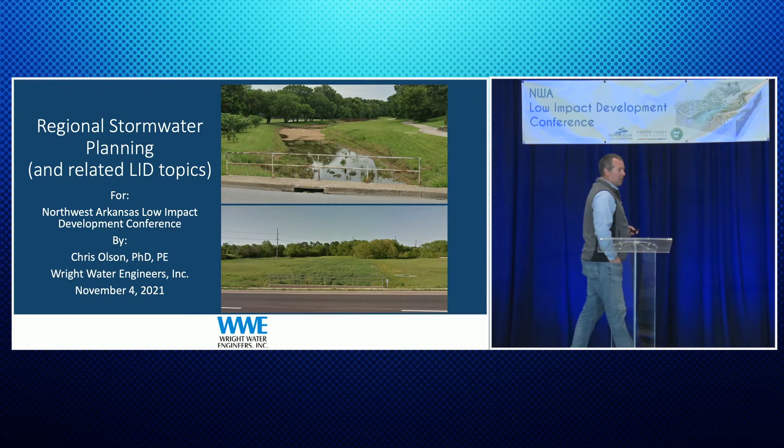I just have a few things I'd like to share with you today about, mostly regional stormwater planning and a few other low-impact development topics. The other topics I'm going to talk about, and these are kind of in the order of length and level of detail: full spectrum detention, which I'll get into, but it's basically a detention basin design technique that we have found is very effective at reducing some of the erosion problems that we've learned about earlier this

week. And then, of course, the more traditional definition of low-impact development, a lot of us start to think about just green infrastructure. We've seen plenty of presentations on these. We do have a lot of experience working with that, so I'll finish up with a few lessons learned that myself personally and Wright Water Engineers have found over the years working with green infrastructure. And then we'll see if we have some time for Q&A.

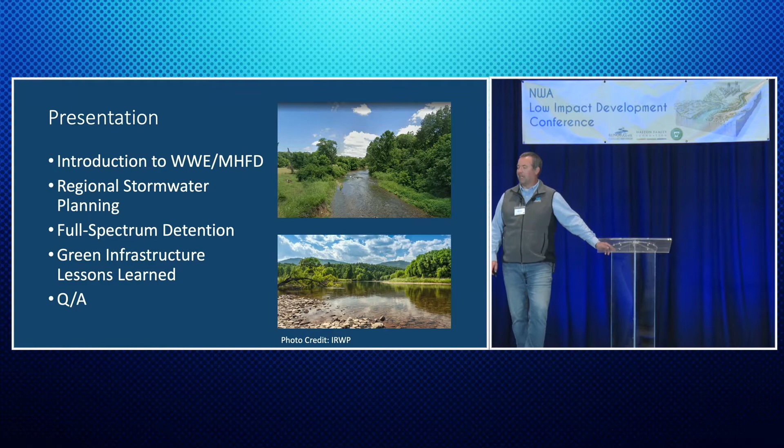So I do work for Wright Water Engineers. The reason I am here is because I'm really standing on the shoulders of giants that have been working in Northwest Arkansas for a number of years. We're approximately 50 employees in 3 different offices, Denver being our main one. We're also in Glenwood Springs and Durango, for any of you that are interested in working for us and moving out to a mountain town.

Those options are available. And like I said, we've been involved over the last 30 years or so, not myself, obviously, but some others, working on a variety of projects from criteria manuals. We saw a little bit about the Cave Springs Recharge Project. We were involved with that. Master plans, permitting, wastewater, stormwater, phosphorus analysis, et cetera.

And Wright Water was founded as an urban drainage and, to a certain extent, water rights firm back in the 60s. And that has really led over the years to a lot of our folks being national leaders in stormwater practice, developing manuals of practice and modeling and things like that. So this is definitely our forte, these types of conferences.

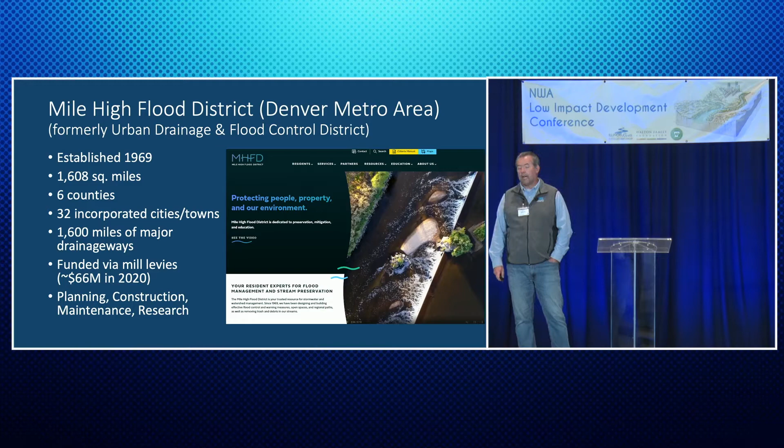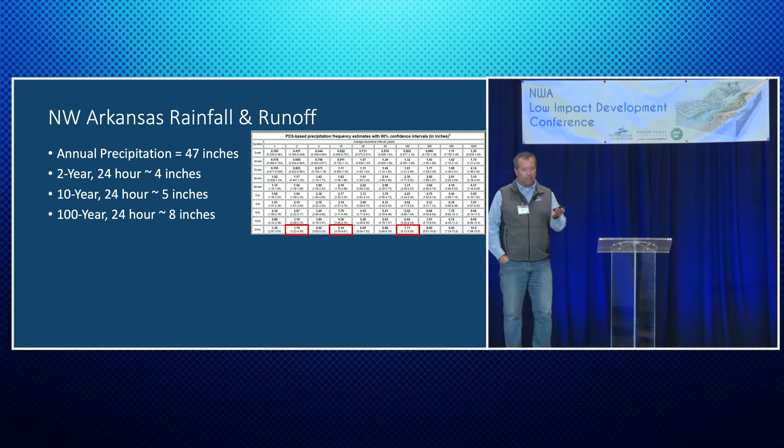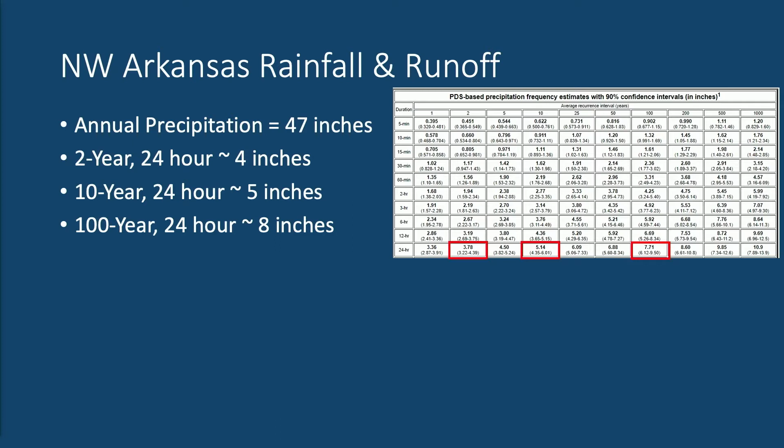So, again, just to start off and put things in perspective. I always like to do this whenever I'm traveling somewhere because rainfall is different and runoff is different. These are just some quick, rough numbers. This is annual precipitation around here. For the different storm events, I'm going to be talking about the 2-year, the 10-year, the 100-year storm event. So you're looking at roughly 4 inches, 5 inches or 8 inches of rainfall. And what does that mean in terms of runoff? Again, these are rough, back of the envelope numbers.

But for converting 1 acre of undeveloped land in northwest Arkansas, we did a low density, like a typical large estate, 1 acre single family home type of development, to high density, maybe 95% impervious. You can see what that results in terms of additional water in the streams.

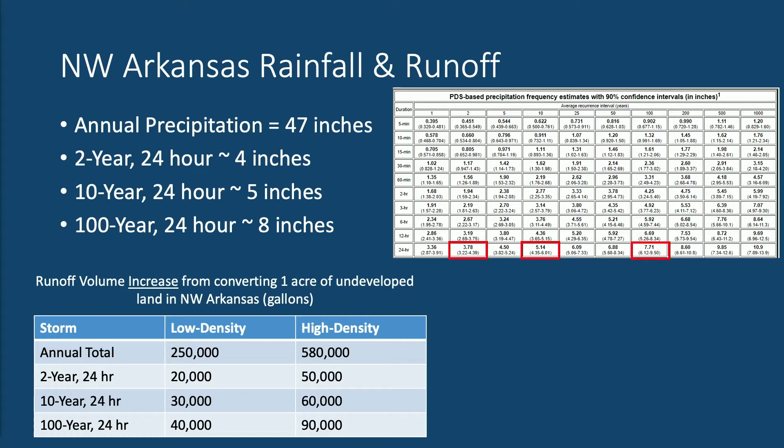Annually, you're looking at about 250,000 gallons of additional water in the stream, up to 600,000 gallons for high density. And that's 1 acre. What's the inside of this hangar? Maybe a half acre, something like that, maybe a third.

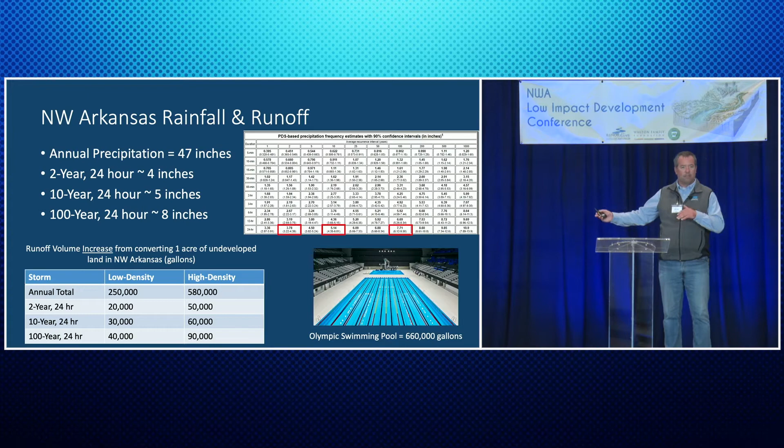So to kind of put that into perspective, an Olympic swimming pool is a little over 600,000 gallons. So if you take 1 acre of farmland and you put an apartment lot to lot on it, you're going to result in an Olympic swimming pool worth of additional water going down the stream each year.

That's not surprising. There's always somebody downstream. It's no different from what is happening around here. So we know this. Stormwater impacts don't follow governmental boundaries. The downstream communities suffer for the decisions and the development that occurs upstream if it's not done well and carefully. And so it just makes sense that everyone recognize they all suffer the consequences from somebody else upstream, and they also cause impacts downstream. So let's come together, work together, let's acknowledge that,

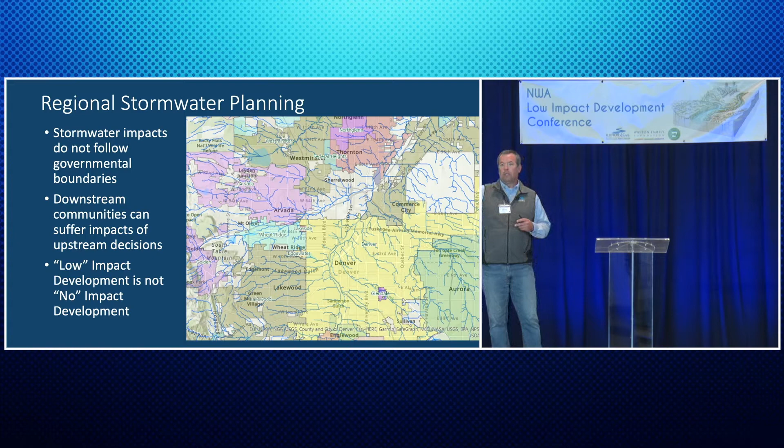and start to figure out solutions. And I have this last bullet point here: low impact development is not no impact development. And I do think that's important to remember, because we can't just be thinking about solving the problems that exist right now. Development is going to continue to occur. And even if we can do low impact development, it's still going to have an impact, and there are still going to be things that we need to think about and mitigate into the future. So we're not just solving today's problems, we also have to predict and think ahead to solving our future problems.

I think the goals of stormwater planning, whether it's local or regionalized, are for the most part simply a difference in scale. We want to protect people and property against flooding and erosion and stormwater quality problems. Obviously, the regional part is that you're working with other organizations, other municipalities, and doing it in a cooperative manner.

You'll see as I go through this, the outcomes of stormwater planning are really capital improvement projects, plans to set aside and preserve space for stream corridors, regional detention, for example. It helps developers understand what they need to adhere to in their development. I'll talk about an example there.

Before a developer goes and decides to purchase 160 acres, for example, they're going to go to the master plan, and they're going to look, and they're going to say, this is what's in the master plan. They've already put in a stream. They're calling for a stream corridor that needs to be preserved. Or they're calling for a regional detention facility in this location. Developers are going to want to know that. And it's important. So we're aiming to set that out and be transparent for the developers that are coming in the future.

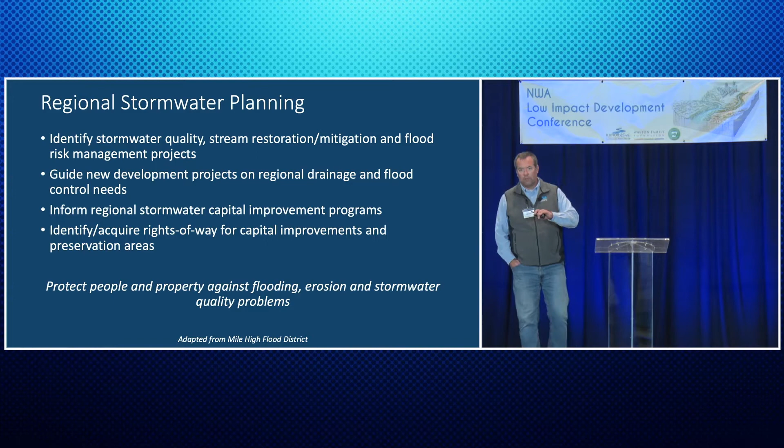Again, I'm presenting our Mile High Flood District, Denver metro area process. It's not the same everywhere, but it's been successful. The first regional master plan in the Denver area was done in the early 1970s. So they and we have been doing it for a while. Again, I'm fortunate enough to learn from the people that had to rack their brains to figure out how to get this to work 40, 50 years ago, I guess.

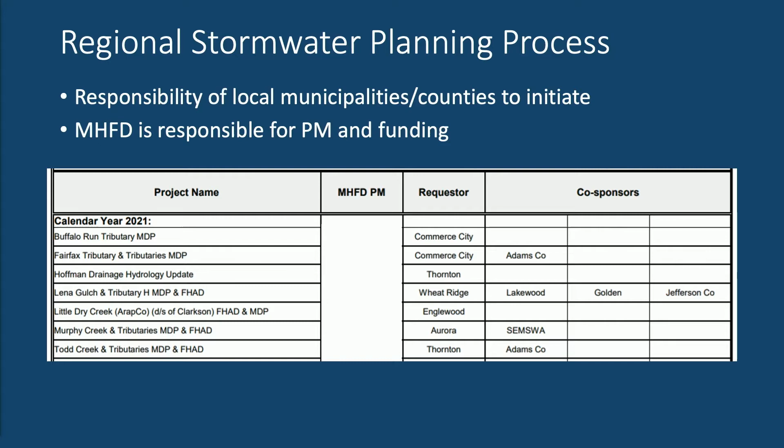The way it works is you saw all those different municipalities, counties, towns, cities on the map, and any one of them can request a master plan, either an original master plan or an updated master plan, at any time. The Mile High Flood District is funded by a mill levy from all those cities and counties. So they go to the district and say, I'd like to do a master plan on Buffalo Run tributary. I'm Commerce City.

Okay, well, there are a lot of those requests that come in every year. There's only so much money, so it gets put on a list. It gets prioritized according to funding and some other factors. And then there are obviously the co-sponsors that are involved. So here's one example, Lena Gulch, that has Wheat Ridge as a requester and then 3 other co-sponsors, because that tributary runs through all 4 municipalities. That means all 4 of these organizations need to come together and work on this master plan. And so then it really becomes the district's responsibility for managing that project and for funding it.

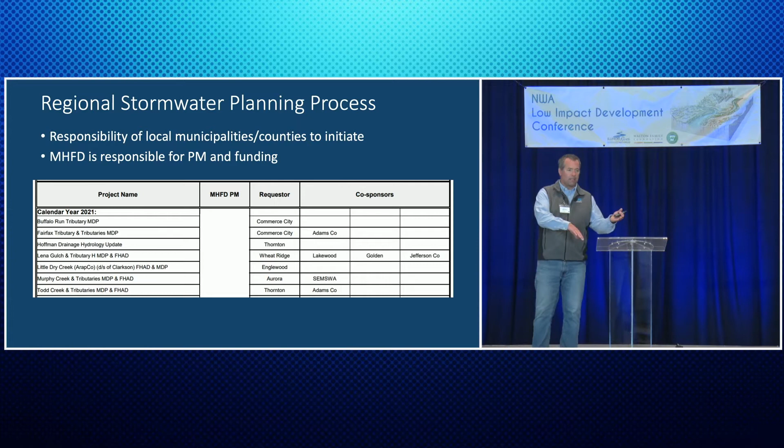I've taken specific names out of this, I know it's probably going to go up on the website and stuff, but the one thing that the district started doing a couple years ago, which I think everyone that's working there thinks is a great idea, is they've assigned specific project managers to each major watershed. It used to be that it was kind of ad hoc. You got a list of project managers, you got a list of projects. Bob is going to be finishing up his project, so he's going to take this project and run with it for the next 6 months or 9 months or whatever it is.

And as you'll see, the results of these master plans are projects, capital improvement projects, and other things. And so it made sense that the person that was involved in managing the master plan also then manages the implementation of those projects down the road. And it's been a great modification by the district to do that because now Joe or Elizabeth or whoever who's managing knows all the projects that are going on.

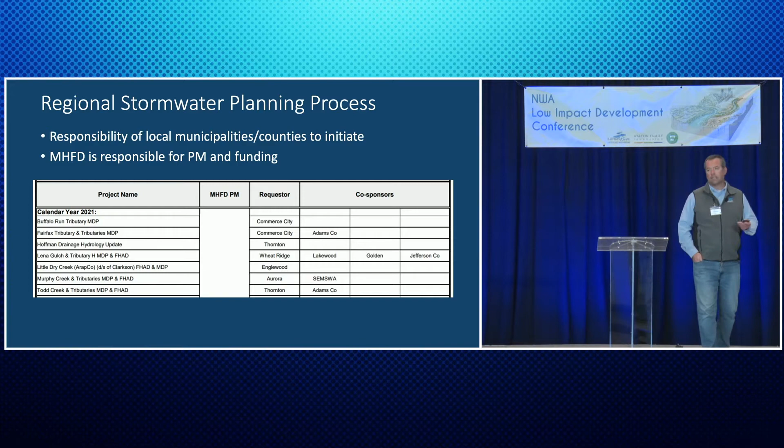So if all of a sudden I get called in as a consultant to work on this regional detention basin and I have to run my models to do my design and whatnot, I go to the project manager and say, hey, did this detention basin up here ever get built? If not, when's it going to get built? Oh yeah, it's in design right now. Here's the specs on it. Put that into your model for your design. They know everything that's going on. So it's been a really good change, something to consider if you guys are doing similar wherever you work.

So really the process is a very engineering process, as you might imagine. We start out with models, hydrology and hydraulics models, and it's not easy to put those together by any means, but that's the basis for everything. That's the foundation. So we generate these models for existing conditions and future conditions, and from those models we identify the potential problems. Where does flooding exist? Yada yada, and I'll kind of go through what those are that we look for.

And then once you identify problems, then you start looking at solutions. And you do an alternatives analysis where you start comparing the costs and the benefits of using this solution versus that solution. And the list here, again, a generally pretty engineered process depending on where you are and depending on the level of development that has occurred. So sometimes it's as simple as upsizing a pipe or upsizing a culvert. Put regional detention here, preserve this stream corridor there, and we'll kind of talk about why we might select one over the other.

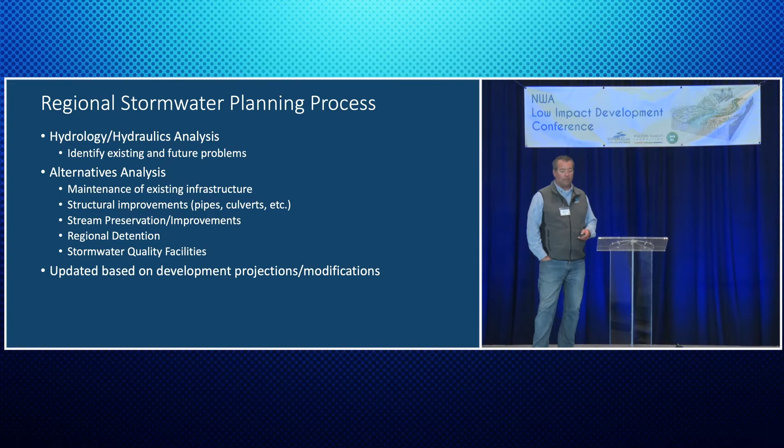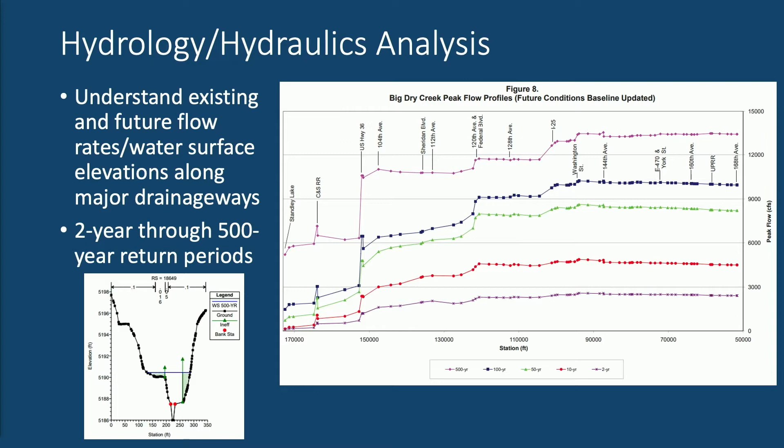It is important, I think it goes without saying, but it's important to understand what your planned future development is. Otherwise, we're just fixing the problems for now. So most cities and counties have some sort of a growth strategy or a growth plan, whether it's zoning or land use data. By 2050, we expect this all to be commercial. By 2040, we expect this to be all low-density residential. The results of your master plan are only as good as your plans for future development, and that's part of the reason why they do have to be updated, as I kind of mentioned.

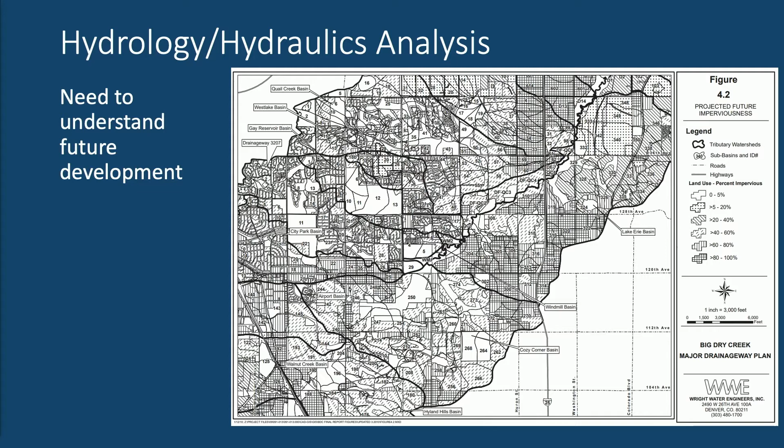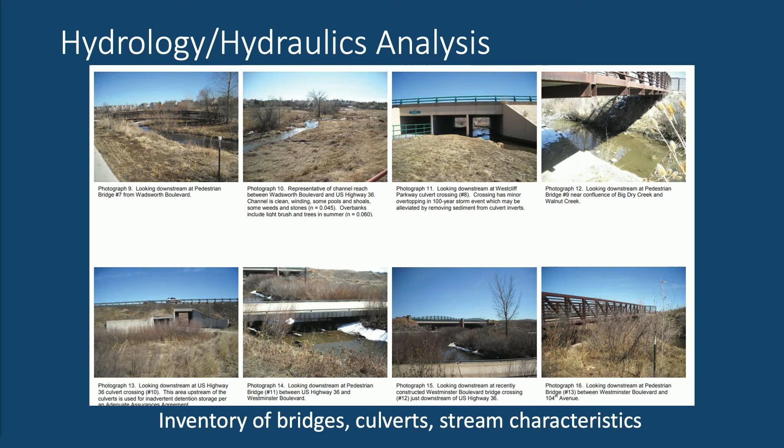Another very extensive part, and I am focusing quite a bit on the H&H here, because it really is the foundation. You need to get it right. You go and you inventory all your bridges, all your culverts, all your stream sections, especially in an area that's already urbanized. And this is quite a bit of work. It's fun work. I like to go out and do it. But a certain master plan can have 100 different bridges and culverts, or 200 bridges and culverts, depending on how big your area is. That's also obviously a very important part of the process.

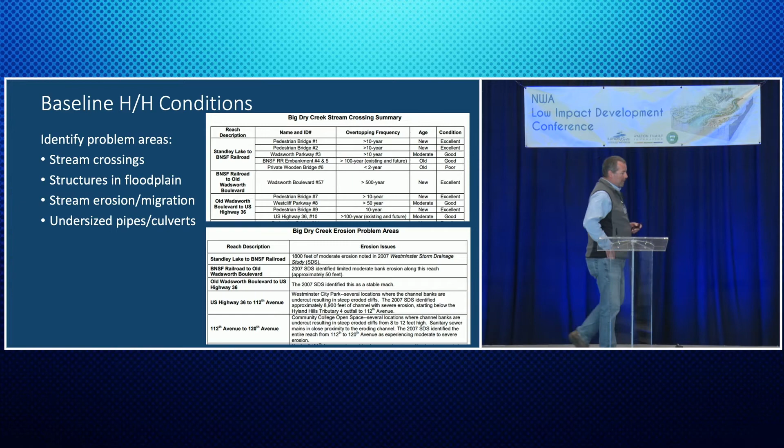And so we do all this, and we start running our models, and that gives us our ability to identify problem areas. A couple of examples are shown here. So we look at our stream crossings, and we see that a particular pedestrian bridge somewhere is going to overtop in the 10-year event and greater. Maybe that's fine. It's a pedestrian bridge, right? But what if that was a county road or some other facility that really shouldn't be overtopping? That's what the results of our analysis will provide us.

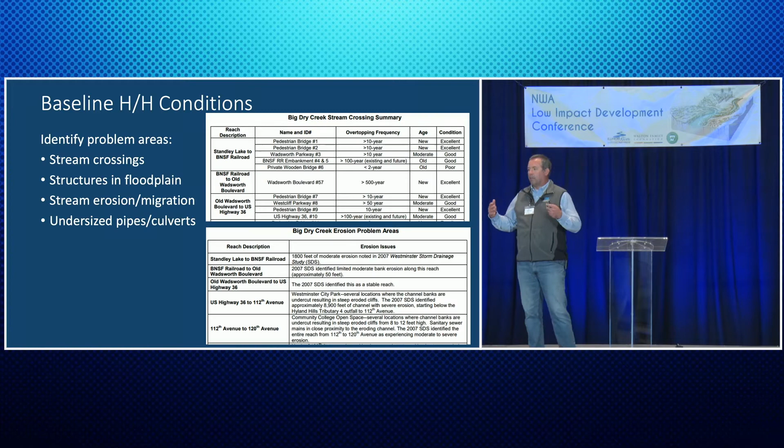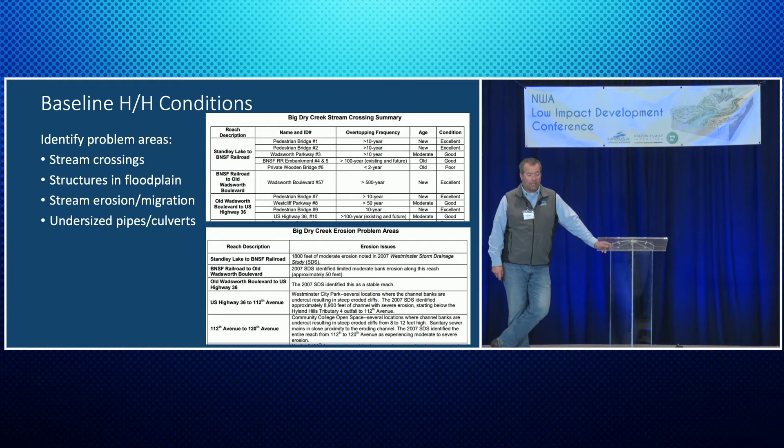The number of structures in the floodplain, that's huge, right? That's one of the basic objectives of doing this, is to remove structures from the floodplain. Identify major stream erosion and/or potential erosion and migration areas, and then obviously different undersized infrastructure. So this is, I think, the fun part for some of us, which is now we need to start figuring out the best way to solve these problems.

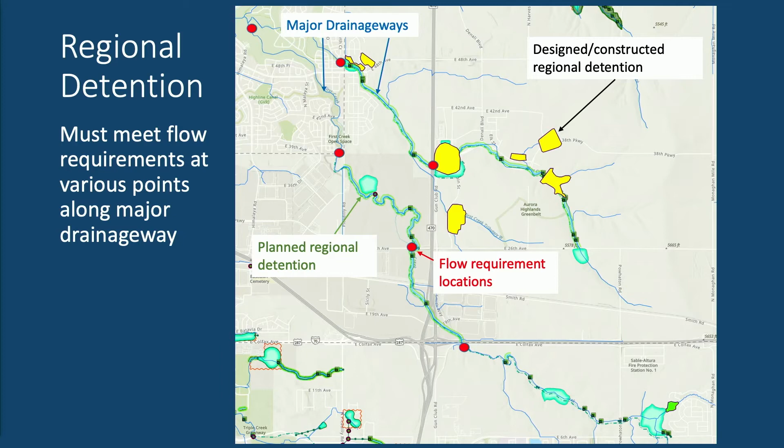So this planned regional detention that I have shown here, kind of highlighted in the middle, this is a project that we worked on, and we were working with the developer on that site, and I knew what the peak flow was going to be upstream. Not right now, but I knew it was going to be in the future, and I had to design for the future. I also knew the peak flow rate that I had to meet immediately downstream of the site. So I had those two constraints to guide the design of that detention basin, according to the master plan.

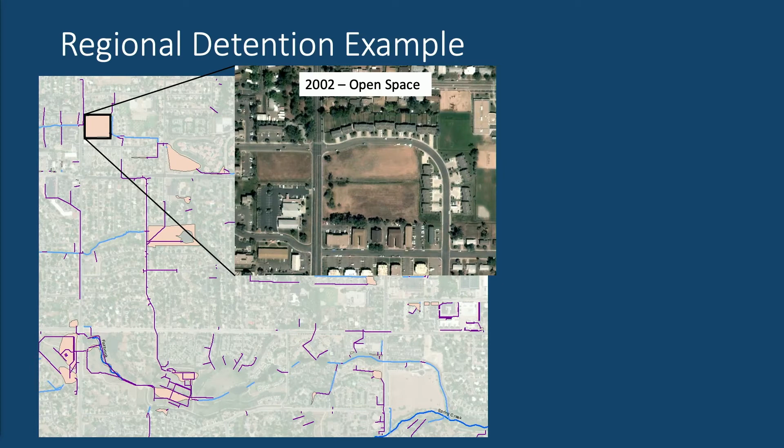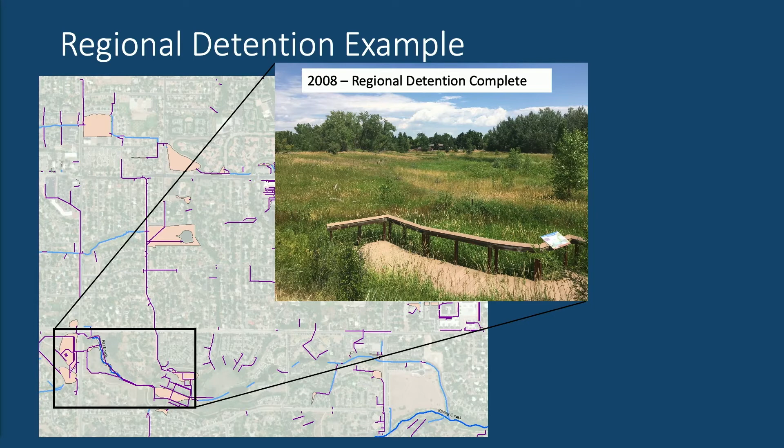Real quick, so these are just some examples. A master plan that was done in the early 2000s, developed watershed, recognized that they needed to keep this area of open space available. It was 10 years later, but they went and finally completed it as a regional facility. And then same thing here, a regional plan that was done in the late 90s. Took a while, but ultimately, a real nice regional detention basin was built.

I like this. It's doing double duty. It really is driven by stormwater control, but you can see here it's a really nice open space. It attracts wildlife. There's trails running through it, so it's a multi-purpose facility.

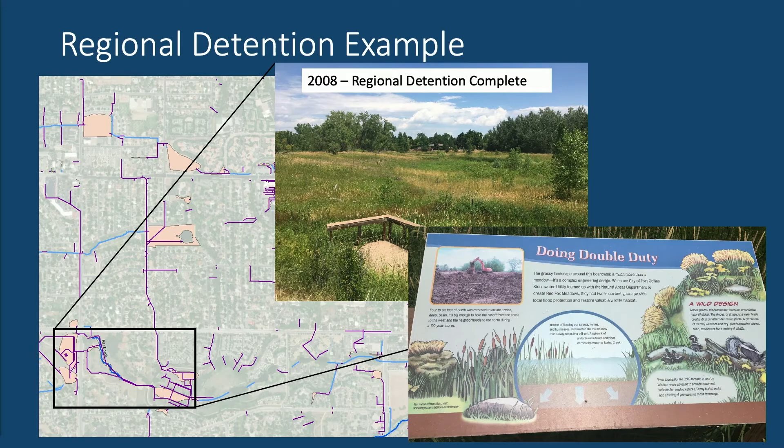Okay, I want to get to the other main topic, so I'm switching gears here. We'll have some time for questions. Full spectrum detention. We've talked a little bit about detention in this conference, and I guess I'll start with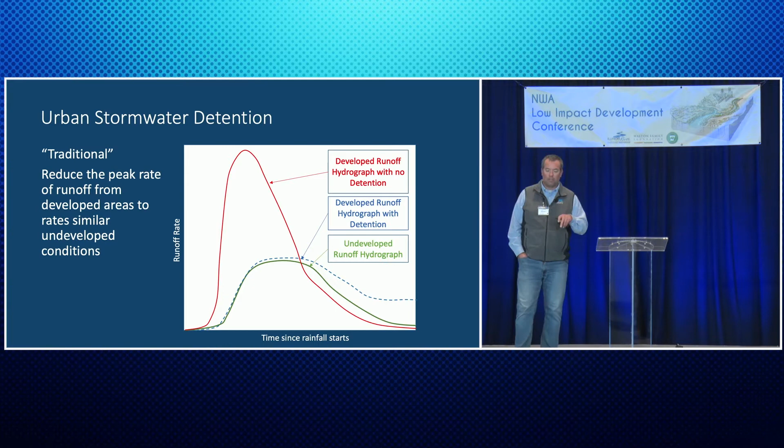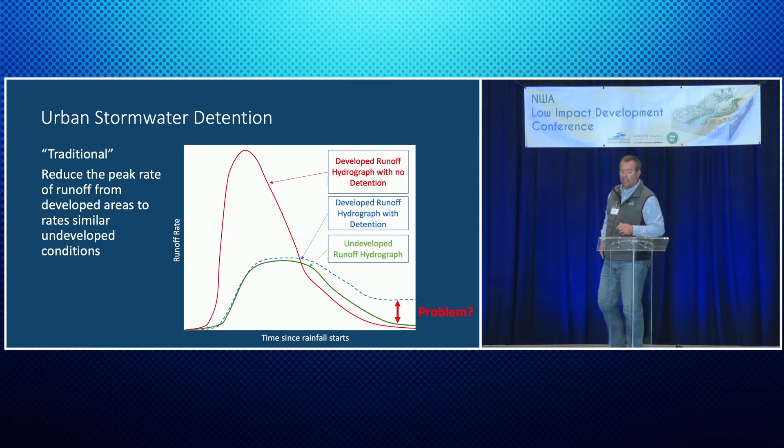But I want you to look at these hydrographs and notice the peaks match pretty close. But once the water starts to drop off below the peak, you'll see that the runoff rate out of the detention basin remains higher than what it was in the undeveloped conditions. And so is that a problem?

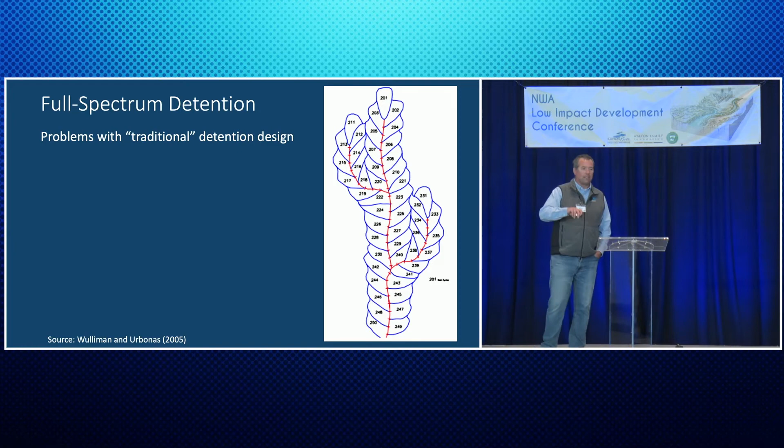Here, let's consider this to be a large regional watershed of 50 subbasins, each of the exact same size. All right, so 50 100-acre basins, they're all the same size. And what I'm going to do is assume that I put the same detention basin at the outlet of each of those watersheds and simulate what that looks like. And these particular detention basins are all sized with the criteria of meeting the pre-development 10-year and 100-year peak.

So if I look at the discharge from one of those detention basins, that's what's shown here in this graph. And if I look at the 100-year, you can see that the red line, which is developed condition with the detention basin, matches the pre-development peak flow rate, the green line, at the 100-year level. Great, we're good. Same with the 10-year. The red line basically falls on top of the green line. We're good.

Now we'll look at the 2-year. Now all of a sudden the red line's quite a bit higher than the green line. It's not quite to the developed without detention blue line, but it's higher. So right away, this might be a concern, and that's because the 1 to 2 year storm event is generally, rule of thumb, what controls the size and the formation of our channels.

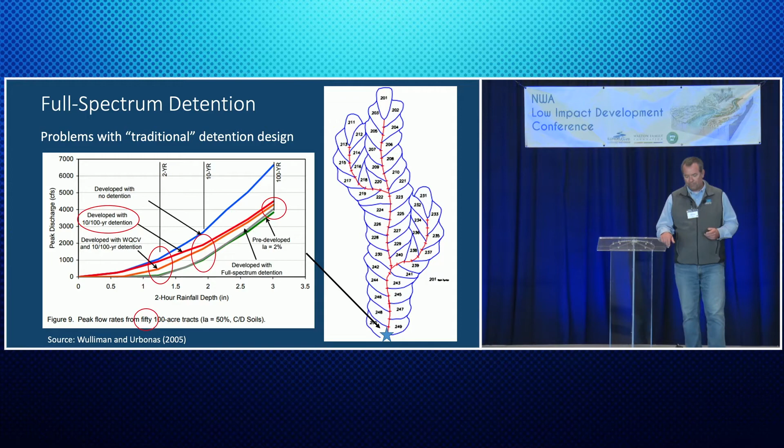So, Ben and Jim, who are obviously much smarter than me, came up with this. They started thinking about this. And the first thing they figured out, they did some modeling, and they realized that the increase in runoff volume between pre-development conditions and post-development conditions is pretty much the same regardless of the size of the event, whether it's a 2-year event or 10-year event or 100-year event. The difference is the same for the same imperviousness of a watershed.

So, for example, what I've circled here is a site with 25% imperviousness. Developing that site with 25% imperviousness results in about 0.3 inches, watershed inches, of additional runoff from that site. That 0.3 is the same whether it's a 2-year event with 1.5 inches or whether it's a 100-year event with 3.5 inches. And the same can be said for other events. In this case, for 100% impervious, if I go from undeveloped to 100% impervious, I have about 1.3 inches of additional runoff.

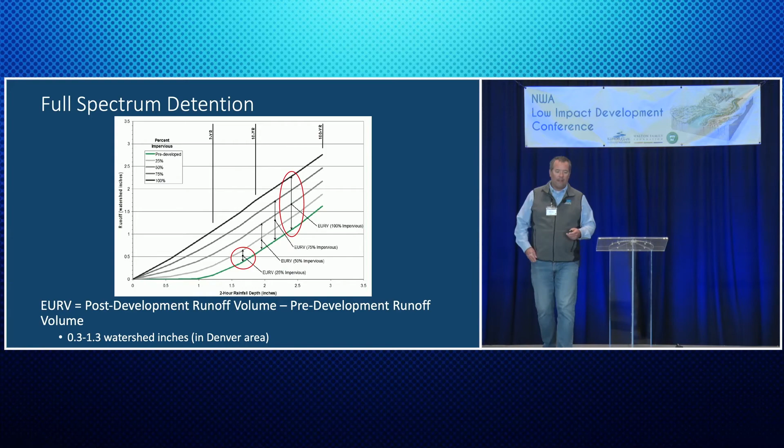So they took that concept and they started playing with it and doing some modeling. And ultimately what they got to was that if we take what they call the EURV, the excess urban runoff volume, the difference between pre and post-development runoff, let's capture that, and then let's slowly release it over the course of a couple days. I'm jumping to the conclusion, but right now the criteria say, at least in Colorado, 50 to 72 hours. Capture that 0.3 to 1.3 inches and hold it for 50 to 72 hours.

And there's not a real physical or scientific reason other than you're trying to release that as slowly as possible to reduce the stream power being delivered to the stream. The 72 hours, this is a Colorado constraint. We can't capture and hold water for longer than 72 hours because of water rights. It's a very Colorado-specific requirement, but it's just something that we have to live with in Colorado because somebody else owns the water.

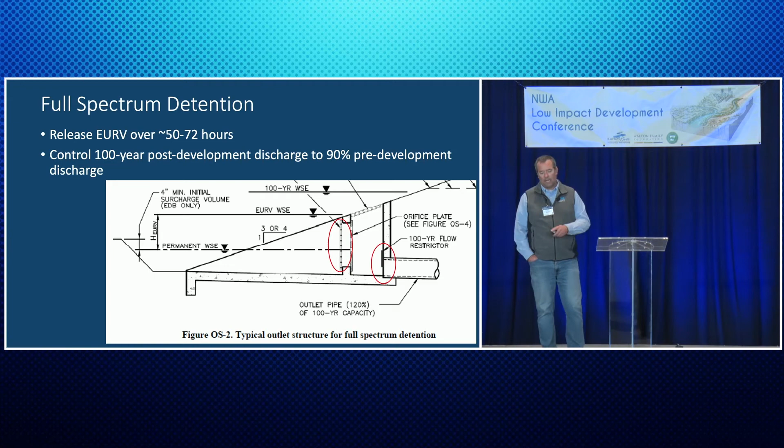Most other places, they may control for the 2-year, and then the 5-year, and then the 10-year, and then the 100-year. And you end up with these outlet structures with holes and rectangles and all these different shapes to try to control each of these. And it's a tough design. This is a very easy design for an engineer to do. They have a spreadsheet that almost does it for you, and it's very effective.

So here's the results now. If I take that analysis that I showed at the bottom of the watershed, now I've applied full spectrum detention to each of those 50 sub-basins. Instead of looking at the red line, look at the gray line, which is developed with full spectrum detention, compared to the pre-development green line. For the 100-year, we're almost the same. 10-year, we're almost the same. And importantly, the 2-year, the erosion storm, we're pretty much the same.

So that's where I'm saying that this is a design that protects against channel erosion, protects against the peak stacking, which is what causes this. When you have tens or dozens of detention basins in one watershed, the peak stacking is what causes the effectiveness to be diminished.

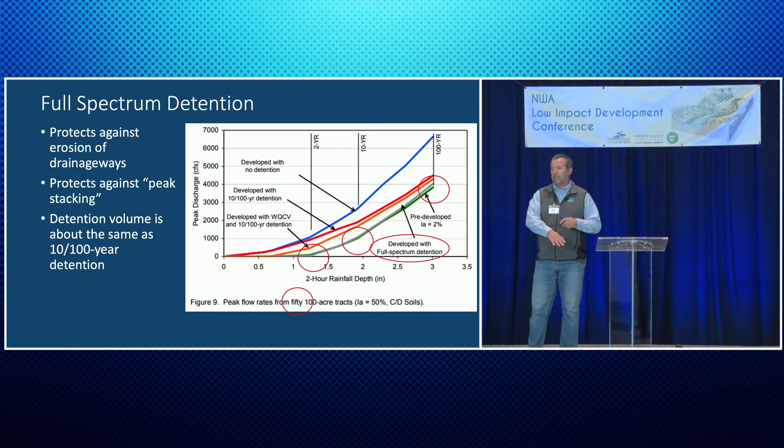And probably most importantly, because this question always comes up: how much bigger is your facility? It's really not. It's not any bigger than if you were to do a traditional 10-year and 100-year. And the reason why? It's the 100-year event that drives the size of your basin. So whatever we're doing underneath that really doesn't change the volume that much.

So I'll preface that before I jump to my last topic. All those numbers obviously are very specific to Colorado, but I think if you followed the same process, my guess is that the concept would apply anywhere. So

this is just kind of lessons learned, open discussion of a lot of the work that we've done on green infrastructure over probably about the last 15 years, at least myself. And what I'm referring to here is really the permeable pavement, bioretention cell type of capture, retain, infiltrate systems that I think most people generally think about as green infrastructure.

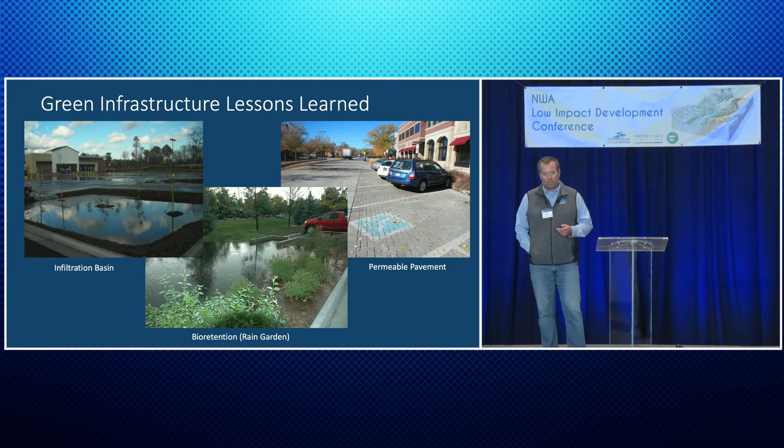So I really got involved in green infrastructure about 15 years ago. I moved to Fort Collins, went to Colorado State University for my master's and PhD, and I got involved with green infrastructure right away. It was perfect timing because the city had started hearing about this green infrastructure, low-impact development stuff, and they approached the professor I was working with at CSU and said, you're a stormwater guy, help us understand what this is. We think it's something we want to do.

So he got some grants and funding and hired me and some other graduate students, and the first step was to build some pilot projects and monitor them. City Council was interested in the concept, but they didn't want to mandate these new technologies without proof that they actually worked in the city. A lot of the research was coming out of the East Coast and West Coast, and okay, that's great, but it also rains 40 inches a year versus 15 inches a year in Colorado. Let's see if these things work.

So we started off by doing a lot of monitoring, permeable pavement systems, rain gardens, et cetera, and it was the monitoring that really proved the performance to the city. We said, look, here's the data. Yes, they capture water. Yes, the runoff volume is reduced. We're getting water to infiltrate. We're getting some pollutant removal too; the water that does go through the under drain, the concentrations are less. Not easy, not cheap, but you need to have that, especially for the council members.

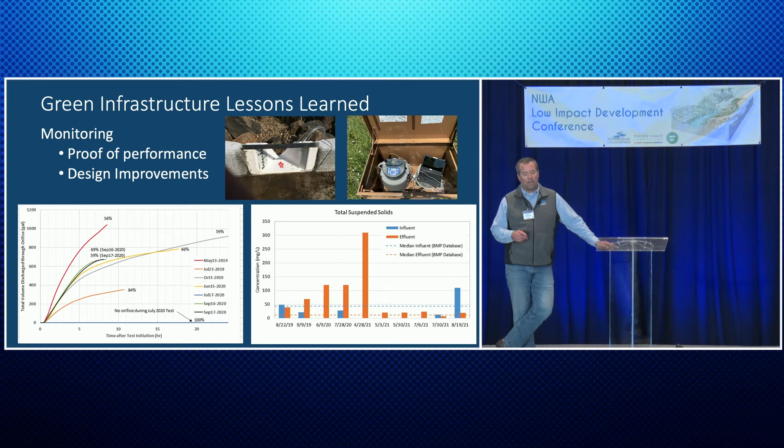We're engineers, we design this thing, it's going to work perfectly. Then we actually put instruments on it. Well, wait a second, how come that doesn't seem right? We have to monitor long enough to make sure what we're seeing is real. But then you make modifications: let's try a different under drain size, different filter material, or a different orifice plate configuration. A lot of these design improvements are driven by real world data. So monitoring is not cheap, it's very difficult, you have to do it for multiple years, but it truly is worth the investment.

So eventually all this went through, and in Fort Collins we now require these infiltration-based practices on all new development or redevelopment to a certain extent. I'm not going to go into those requirements, but there's a lot of green infrastructure that's gone in over the last 10 years. Whenever a new project was being designed, the city would let me know: we got a new permeable pavement system going in, a new bioretention cell going in, et cetera.

As soon as that thing was built, I'd go out every time it rained to see how it was working. And as you might expect, I didn't always have the best news to report back to the city. I'd say, there's no water getting in this thing. Or, there's water getting in, but it's just sitting there, not going anywhere. You name it. We'd start diagnosing it, and it was either flaws in the design or the construction or both. And it made perfect sense. The engineers designing it and the contractors building it had never worked with this stuff before.

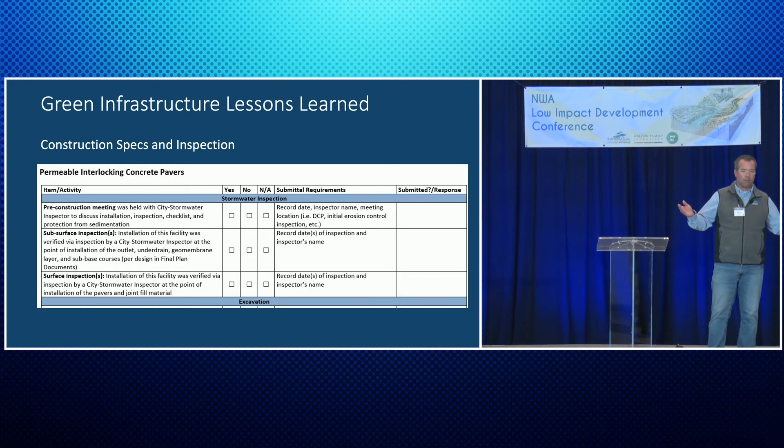So they have to go out, as you can see here, subsurface inspection, surface inspection, pre-construction meeting. Let's make sure you guys understand this isn't what we traditionally do or what you're used to. It's been enough years now where this is becoming less of an issue because the contractors are building this day in and day out. They've been putting permeable pavement in for 6, 7, 8, 9 years now. But anyways, that was a lesson learned.

And then finally, I know a lot of people have really hit on this, but it really can't be emphasized enough. It's the maintenance. One of the things that I also did when I was at CSU as part of the Stormwater Center, other cities would invite me in to kind of talk about maintenance, and then they would always take me on a tour of their facilities, and there was rarely a facility that I went to that did not need some type of maintenance. Like somebody mentioned this morning, I think it was Mark in Nashville, 50 to 75% of the inspections come back with something needs to be done. Yeah, absolutely.

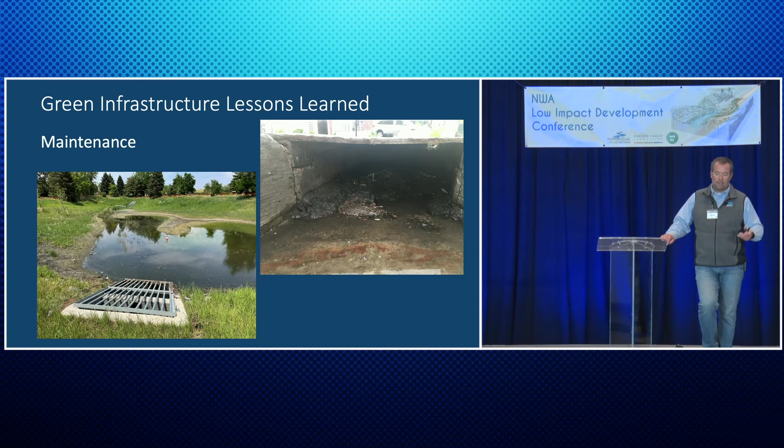The cities can only control so much. They can control the facilities that they own. That's fine, but make sure that at least those facilities that you own, you can maintain. It's not rocket science. There needs to be a schedule for it. Somebody needs to be taught how to do it, and that's it. It's no different than cleaning out an inlet like you do every fall or every spring, cleaning out a culvert like you might do every few years, whatever it is. So I left a few minutes.

Thanks, Chris. Questions for Chris? Full spectrum detention. Yes, come on up.

I think I understood you to say you don't own the water in Colorado. Who does? I wish I owned water because I would probably be able to sell it and not be here right now. But no, people do own the water. Various people own the water. What I should have continued with is that the water that falls on your property, the water that falls on my home or my driveway, I cannot legally take and use that water because somebody else owns it.

Somebody downstream owns it. And so the idea that we can just capture water in a detention basin and sit and hold it there for days and days has the potential, if you multiply that by hundreds and thousands of detention basins, to injure somebody downstream. In other words, they don't get their water that they're supposed to have. It's a Western water rights issue.